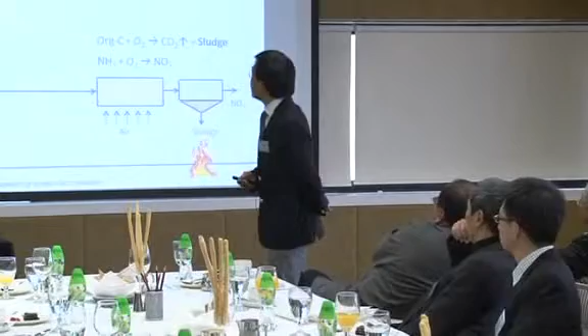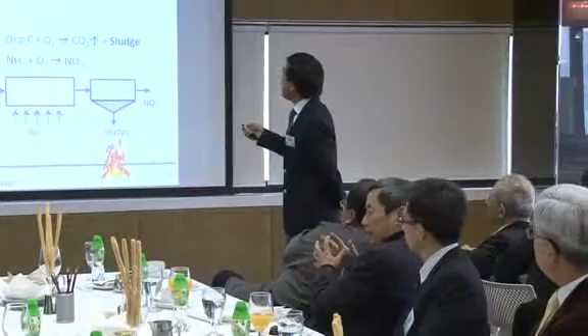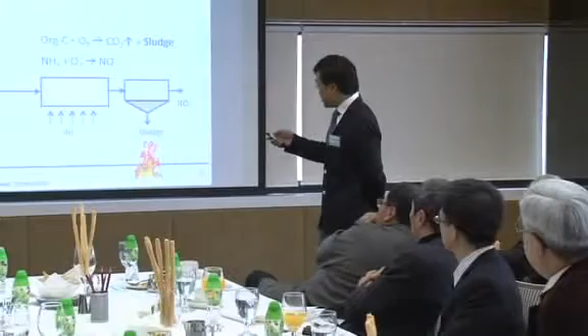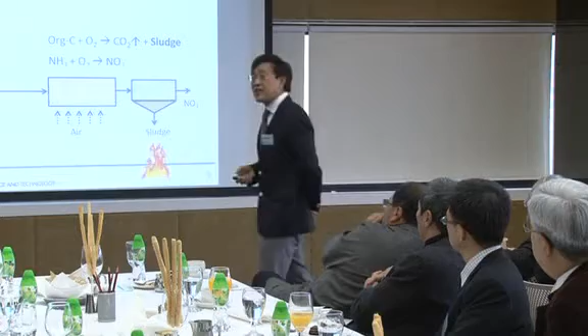Now, the background of the innovation. What is the beauty of SANI technology? Look at the 100-year history of biological treatment, the main technology of large-scale industrial and domestic wastewater treatment. It was invented by two British engineers in 1914, a simple natural way: pumping air to provide oxygen to oxidize organic pollutants and convert organic matter into CO2, completing the natural cycle.

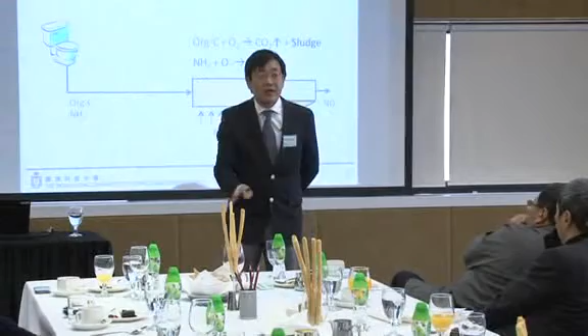It's a good idea. But the problem is that oxygen hardly dissolves. Lots of air is pumped inside. In Cantonese, sai here.

Only a few percent are working. Most of them just go through it without making any contributions. That's the reason it's expensive. Secondly, this conversion, no matter what you do, can only convert 40% of carbon into CO2. The other 60% of carbon will stay in the form of sludge. So this conversion is not a beautiful conversion. It's energy intensive and half-baked.

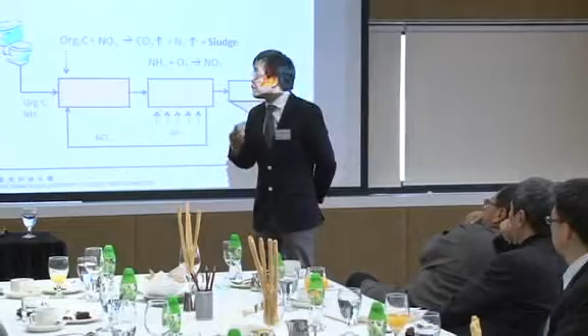But it's a natural reaction we know. We can do it easily everywhere; we do it this way. And so this technology has been used everywhere, and we know the problem. And by 1962, a few professors invented another new thing that we can add on: removal of nitrogen, because nitrogen is another major pollutant to our water bodies, causing algae blooms and excessive algae growth.

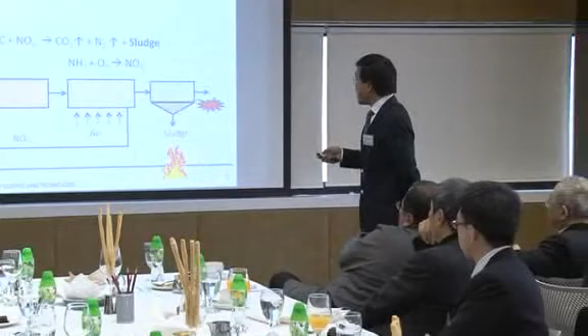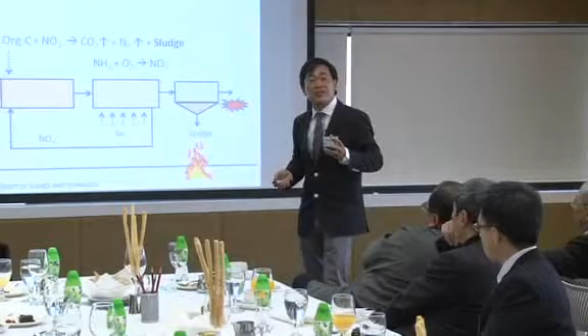So we can add this reaction, again using organics to do denitrification, converting nitrate back to nitrogen gas. Again, it's the nitrogen cycle, a natural reaction. And this reaction cannot solve the problem because we still use oxygen. And this reaction again produces a lot of sludge, the same as the organic oxidation. Okay?

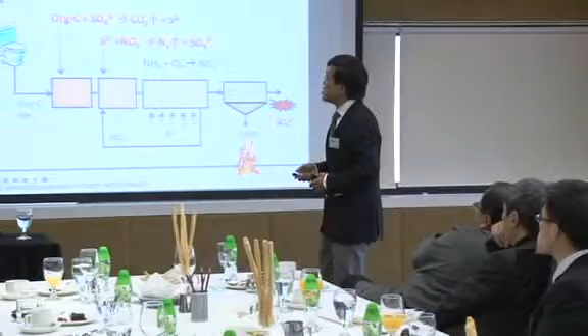And now, we invented technology because we know that Hong Kong has been using seawater to flush toilets for 50 years already, saving tremendous fresh water, 22%. Every day, 750,000 cubic meters of fresh water saved, much cheaper than Singapore's NEWater, I'm sure. They are only doing a few percent. We are doing 22%. Great engineering success. All right?

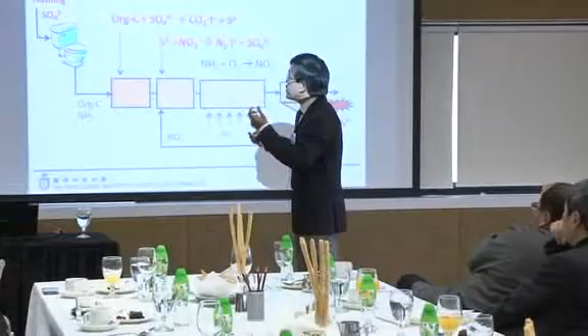Because of this practice, we realized in 2002: can we do something to maximize the benefits of seawater toilet flushing and get green technology developed? Now remember, seawater toilet flushing brings a lot of sulfate into our sewage, causing problems. We know, smelling problems. That's the bad side. We want to turn the bad side into the good side.

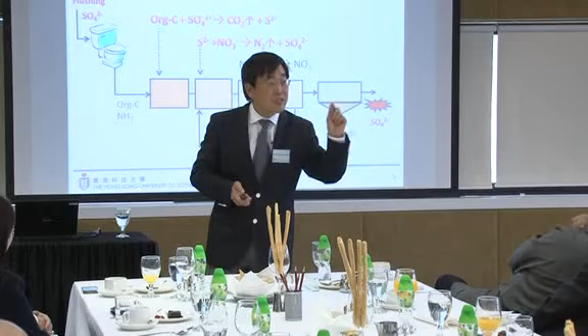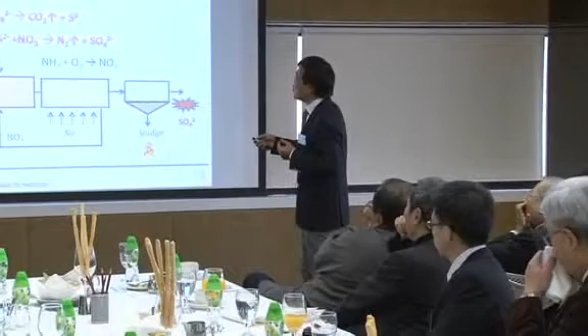Now, the idea is that sulfate can convert organic carbon into CO2 very efficiently. That's the reason we have smelling problems everywhere in sewers. This knowledge has been with us for many years. Of course, you can tell me, anything new? The new thing is that we can use this sulfate to convert carbon into CO2. Why won't H2S be produced? No smelling. So the beauty is here. I'll show you later why. And that's what a lot of people forgot.

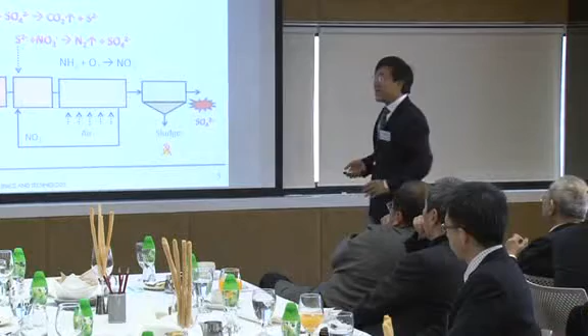When we searched the patents, there were a lot of patents, but none of them hooked up to seawater toilet flushing, saline sewage, salty sewage. Then the product can be utilized as a reactant for denitrification to convert nitrate to nitrogen gas. So we are completing the carbon cycle and nitrogen cycle here without being bothered by oxygen. We don't need oxygen from air. You don't need to pump a lot of air. You solve the problem from the root.

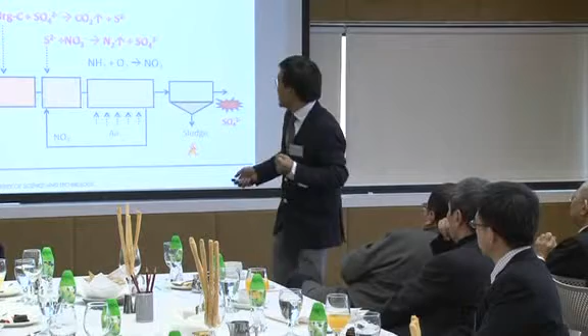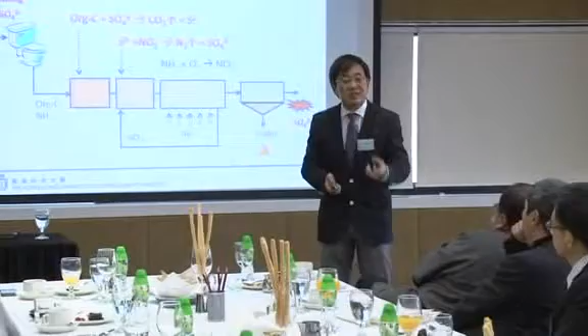And this sulfur cycle produces almost no sludge. That's good. I'll show you the reaction equations later. So with this simple idea, by making use of sulfate originating from the toilet flushing practice, we can turn wastewater treatment into a green process, saving space, saving money, saving energy, and more importantly, we don't need to worry about the sludge anymore.

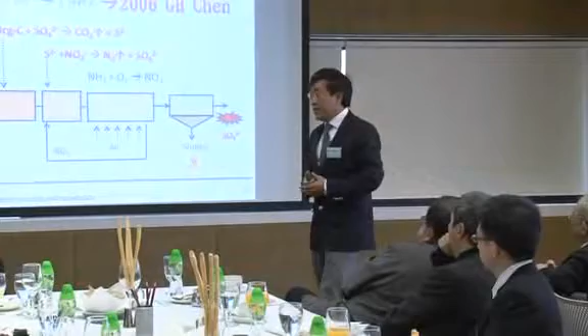That's a huge impact. Okay, so our news was released. I was told by my friend that 100 Chinese news websites reported the HKUST SANI technology. It's good PR for HKUST. Sure, I think our president will be very happy.

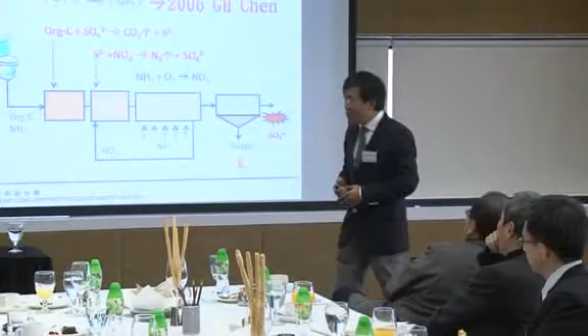Okay, so this technology will redesign 100 years of treatment technology because the concept changed, from the two-cycle idea used for 100 years into three cycles. Scientifically, it's new that we're adding this cycle. So everything changed from two dimensions into three dimensions, from oxygen into these three cycles. All the reactions are natural reactions. We don't need any special bacteria. They are all natural bacteria, natural biomass.

However, what we do is introduce new reactions to realize something new in the practice of wastewater treatment. We named this technology from the long name, sulfate reduction, autotrophic denitrification and nitrification integrated process, shortened to SANI. And it happens to sound like the Chinese name for killing sludge. So very lucky, okay?

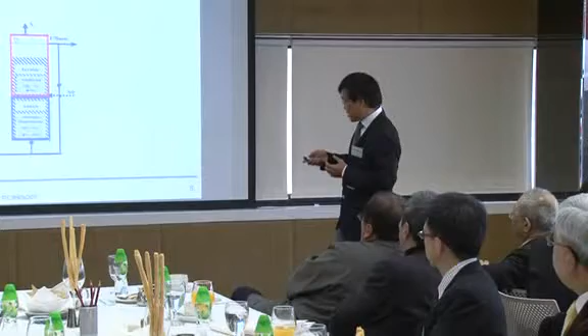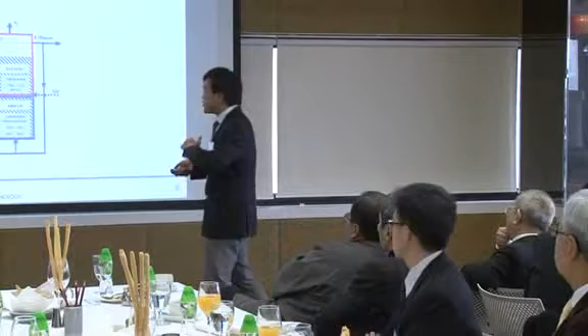In terms of application, technology depends on the concept. If the concept is okay, we can develop it into a working system, which has three reactors. Number one is sulfate-based organic conversion under anaerobic conditions, no oxygen, in a UASB, upflow anaerobic sludge blanket, which is a quite common means of treatment. Then we produce the sulfide, and the sulfide will be utilized in the reduction of nitrate into nitrogen gas.

So the concept is sulfate from the beginning to sulfate again. You may worry about problems, but no problem, because sulfate has already been with us. We just turn it around. We don't produce any harmful byproducts. At the same time, we don't have sludge. We discharge our treated wastewater into the ocean. No problem, because it's a natural cycle. We have a lot of sulfate in the ocean.

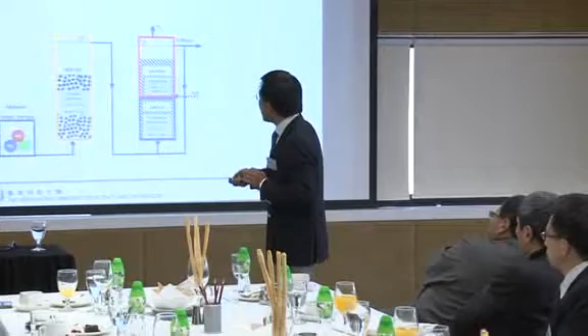If you discharge it into a freshwater body, then you should watch out for the concentration of sulfate. So in toilet flushing areas, no problem. It is a natural cycle. You don't need to jump up and say, oh, any problem? No, no problem. Okay, this technology,